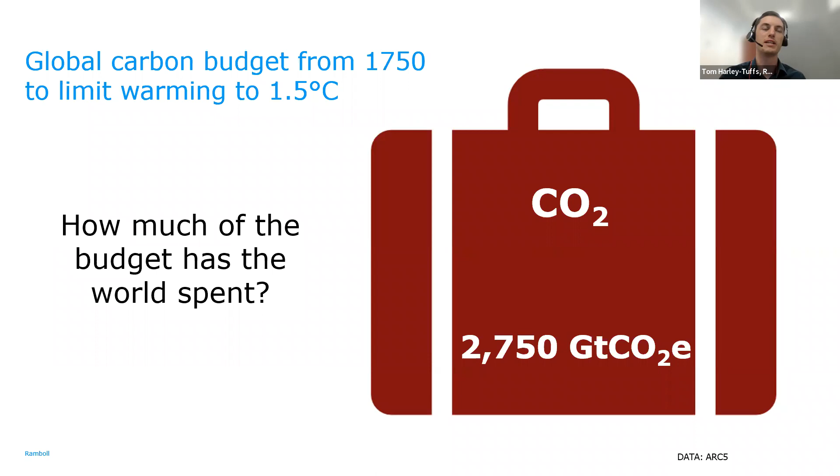So this is our global carbon budget. As of 1750, if we want to stop the world from warming more than 1.5 degrees on average, we have only got 2,750 gigatons of carbon dioxide to spend. How much have we spent so far? Unfortunately, we've already used 90% of that budget, so we're quite a long way there. The latest IPCC report is pretty damning and says we're pretty unlikely to get 1.5 degrees now.

The most depressing thing is that I made this slide 3 years ago and had to chop off 5% and 3 years of remaining life left. So we're not moving fast enough and we need to change what we're doing now. I hope that's fairly clear and obvious from all the work you've seen and all the press recently, but yeah, this is very much our problem to solve immediately.

Our current spend globally is about 42 gigatons a year. So at this rate, we've probably got less than 7 years left. There's a good chance we'll actually pass the 1.5 degrees C warming threshold before 2030, which is obviously not ideal.

But buildings are a really key part of this, and you guys have got a lot of influence over this. In terms of global emissions, buildings contribute about 40% of that. So 28% roughly is the operational emissions - that's the running, heating and cooling of buildings, using electricity for services, things like that. And then 11% is the embodied emissions, and this is where we have a big influence as structural engineers, because this is basically all the products and emissions that go into manufacturing products and construction materials.

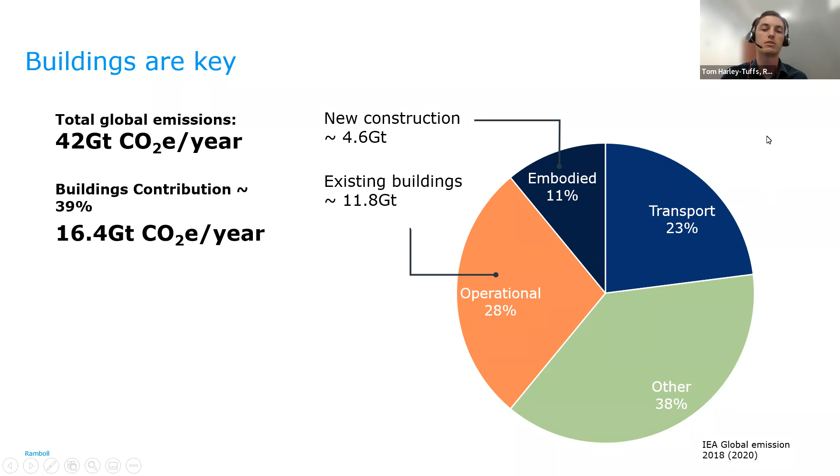So does anyone want to have a guess at what their influence is? This on the left is your personal influence. I had a quick look online - I think it kind of depends exactly which Caribbean nation you live in, but it's somewhere between 2 and 3 tons, potentially a bit more in Trinidad, I can't quite work out why. In the UK it's about 5 tons, although to be fair we tend to export all our emissions, so we don't manufacture products in the UK - we get them from other places, and there's a bit of accounting magic going on there.

But this is like your kind of personal impact - all the food you eat, heating or cooling your home, driving around, getting to work, etc. Does anyone have a guess at what your professional emissions are likely to be in the order of? This is like the influence that you have over projects. Feel free to put your answers in the chat.

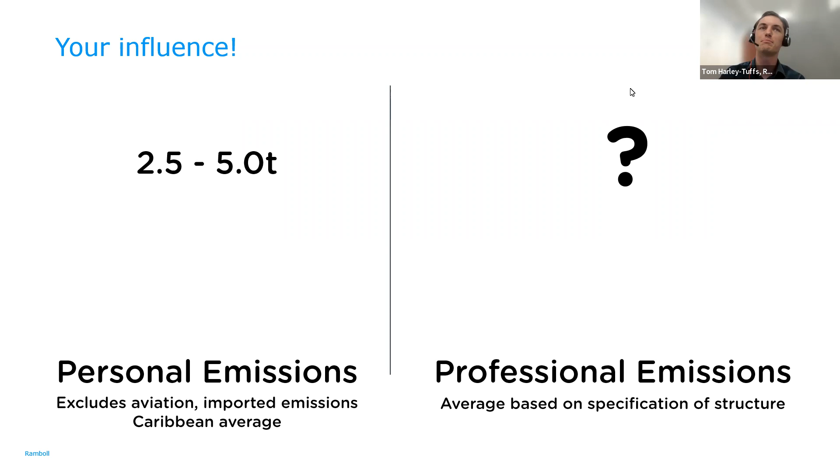I'll give you a clue - it's more than 2.5. No guesses? No one has any idea? Oh, 20 tons? 3.5? All good guesses. Yeah, it's more than that, a bit higher. The answer is about 900.

So this is based on a study that we did in the UK of our building structures teams, and it was based on basically the total amount of buildings that we design in a year, divided up equally between each person in the buildings team. So this is your professional influence. It depends exactly how you measure this, but it's going to be orders of magnitude, probably at least 2 orders of magnitude larger than your personal impact.

And the upshot of this is that if you can design your buildings to be 1% lower carbon, so you can cut 1% off the footprint of your buildings per year, you've already saved more than if you cut your entire personal carbon footprint. So the biggest impact you're going to have is through your professional career.

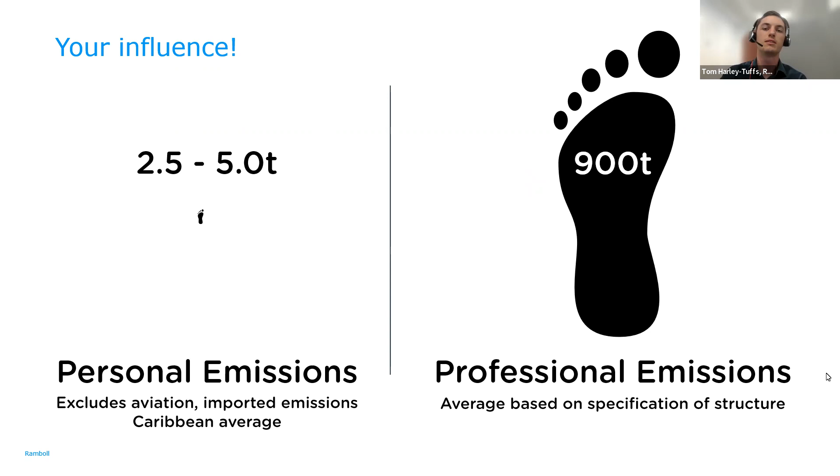So how do we actually do that? Well, first of all, we need to know where the carbon is, and that's where life cycle assessment comes into it. Life cycle assessment is basically the tool to measure environmental impacts of construction. It's pretty simple really - we design some buildings, you calculate all your material quantities, and then you multiply those quantities by suitable carbon factors, and then you add it all up. It's just a big accounting exercise, basically, and you get a carbon footprint at the end.

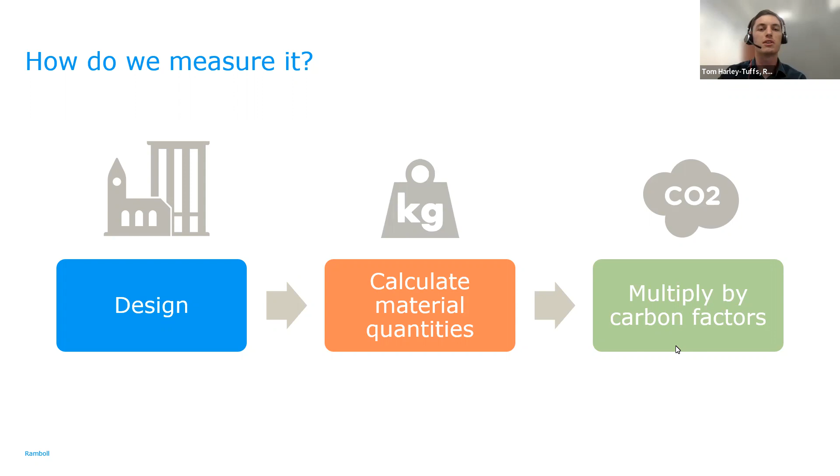And that kind of tells you where the carbon is in the building. It's slightly more complicated than that, but that's the high level principle. You might have seen this before - these are the different life cycle stages. I've pulled this out of the IStructE guide, how to calculate embodied carbon. I'll talk through each of these in a little bit more detail. So at different stages of the building's life, it has different environmental impacts, and the materials and products that go into the building have different environmental impacts, hence life cycle assessment covers the whole life cycle.

There's first of all the product stage, which is your A1 to A3. So this is all the kind of upstream impacts of basically manufacturing the materials - that's extracting all the raw materials, transporting it to a factory, the manufacturing processes and any kind of energy used, for example in processing steelwork. There's a lot of energy in the A3 stage. Then you've got to get it out of the factory gate to your site.

So that's the A4 transportation stage. And then you've actually got to assemble it and turn it into a building, so that's the A5 construction stage. These A stages are basically everything that happens before the building is occupied, up to practical completion. That's often referred to as A1 to A5.

And this is kind of where you can have the most impact. If you look across the whole building, it's not just the structural bits, something like half of the whole life embodied carbon is just in these upfront bits, plus another 5% on transport and construction activities.

Then the building's in use, and over the next 60 years it's going to be used, maintained, repaired. Maybe you need to replace the facade at one point during its life, but you keep the structure. This is more relevant to the architectural and services bits, because most of the time we put a structure in and leave it. We don't have to worry about it because we design things to be durable. But that's the B stages - that's all the in-use bits.

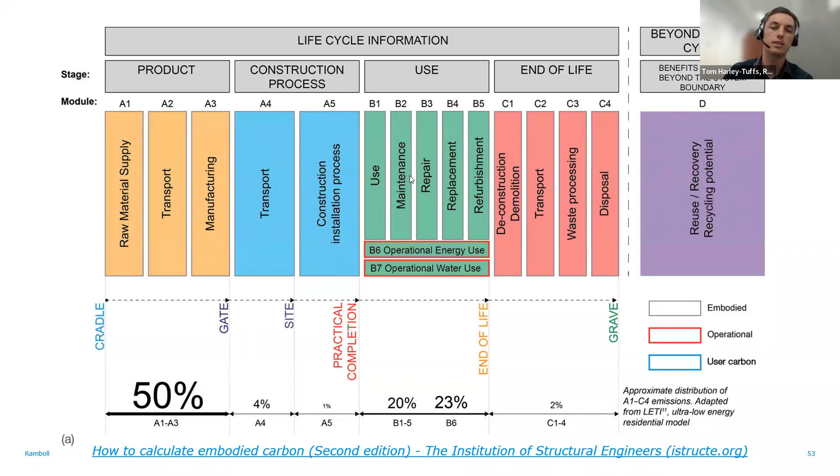So that's also kind of a measure of circularity, although not really a very good one, but it gives you an idea of it. The vast majority of these carbon emissions are actually in the upfront bit, and that's also where the majority of the structural engineer will have an influence. So when is the carbon emitted?

This is like a life cycle of the building. Most of it is going to happen at year zero, before the building is even built. Around 50% of the building's whole life emissions actually occur before the building is even occupied, so this is where we can have the most impact. And then these next bits happen over the next 60 years or so.

Hopefully electrical grids will decarbonize, and this will reduce over time anyway. And with any luck, in 60 years time when this building reaches the end of its service life, there'll be better systems and processes for recovering materials, which also reduce that. So really the main impact we can have now is in this upfront stage.

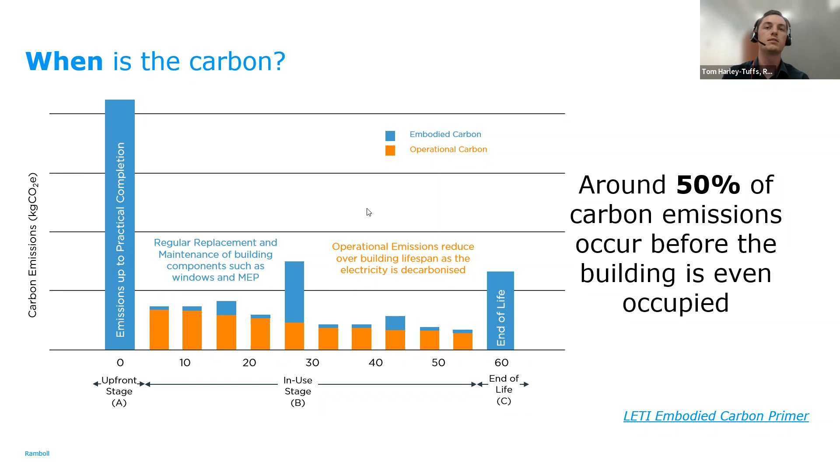It's interesting that if you break down those upfront carbon emissions, the structure is actually the majority of those upfront emissions. This is an internal project database we've got, and we've taken an average of about 50 different projects here. This is not just looking at structures, it's looking holistically across the whole building. And of your upfront emissions, the structure is more than 50% of those initial upfront emissions.

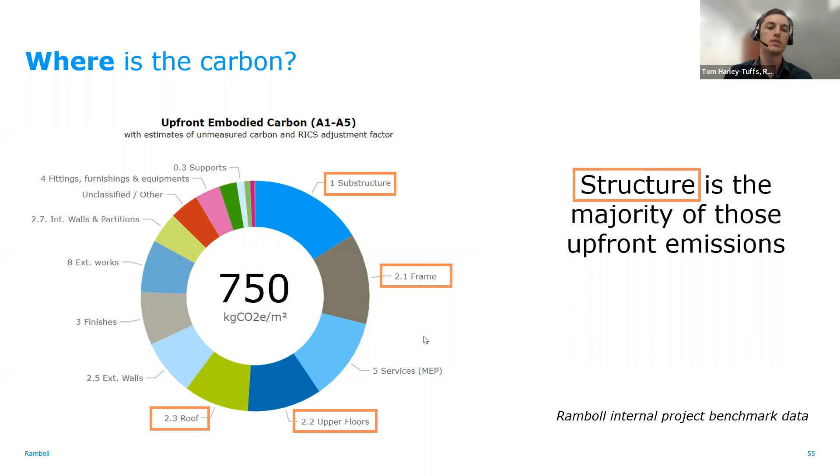So the question is, where is it in the structure? And again this varies quite a lot. It could be in the substructure - if you've got a large basement, for example, basements are very high intensity. It could be in the structural frame, it could be in the floor slab, and usually the floor slabs are quite significant. It could be in the roofs, or in the stairs and ramps. But this just shows that there's a huge amount of variability in projects.

Trying to draw a consistent benchmark and say every project needs to be less than 300, or whatever number you pick, is quite difficult because there's just so much variation. It's very project specific. We had a question about targets last week, and this shows you how hard it is to actually draw a realistic target.

It's worth noting that some of these, basically all the ones down at this end, these small impacts, are all just refurbishment projects. So there's very little in the way of structural change going on, and therefore the impacts are quite low.

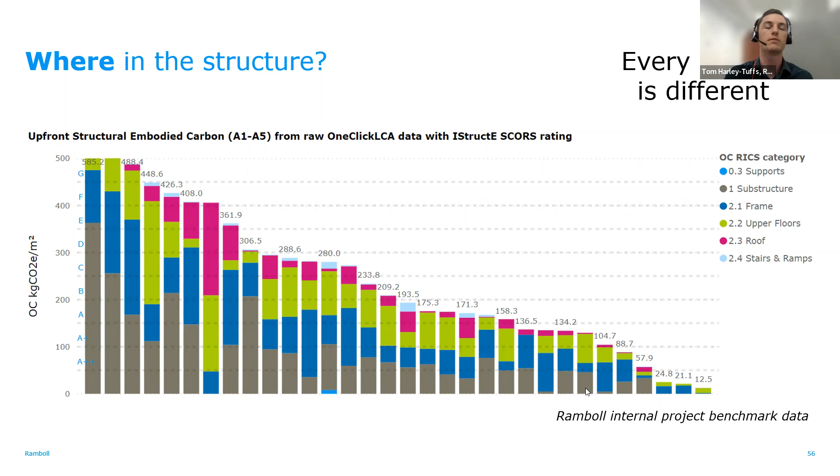So what materials actually are contributing to that carbon? Well, certainly in our project database, the majority of it is the concrete, ready-mix concrete, either regular strength or high strength. It's the reinforcement going into the rebar, it's structural steel and steel profiles, and then it's site operations as well - basically excavation works, piling rigs driving around, energy and fuel use on site. This is the A5 bit of your construction. But these key structural materials are a really big impact.

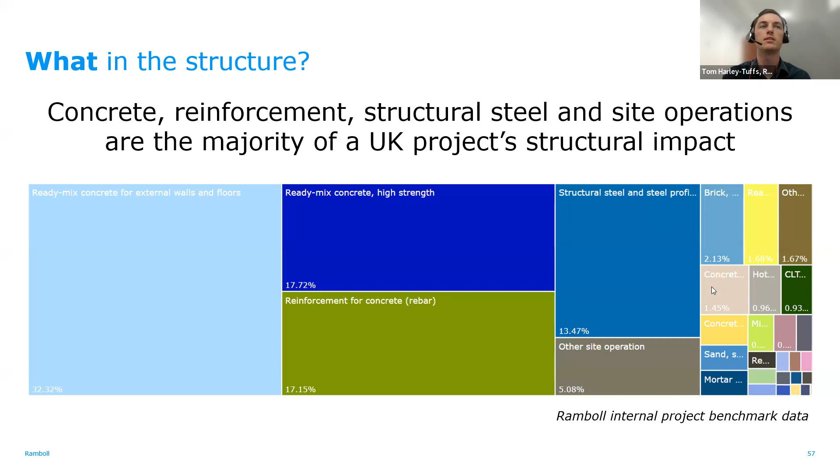There's a bit of CLT and some other timber stuff in here, but that just shows you how uncommon timber construction is still in the UK - our selection of 50 projects doesn't necessarily include that much.

Great, so now let's talk about material impacts. We understand where the carbon is and what the different life cycle stages are, and basically how to account for it.

We've got another challenge for you, which we'll see if this works. It seems like it's a slow lunchtime for everyone. But we've got a few carbon factors on screen - these are kilos of carbon dioxide per kilo of material used in the building. We've got some very high intensity materials here, and there's also relatively low intensity materials down here, or some averaging ones. Not quite sure how I'm going to do this pop quiz, but there's a few different materials.

We've got steel, concrete, timber, insulation, and plasterboard - 5 options here. So maybe just have a think about which ones you think are going to be the highest intensity, and which ones you think are going to be the lowest. Maybe I won't do answers in the chat since you'd have to cover all of them, but just think about it - for example, you might expect concrete to be really high intensity because you've heard it's really bad.

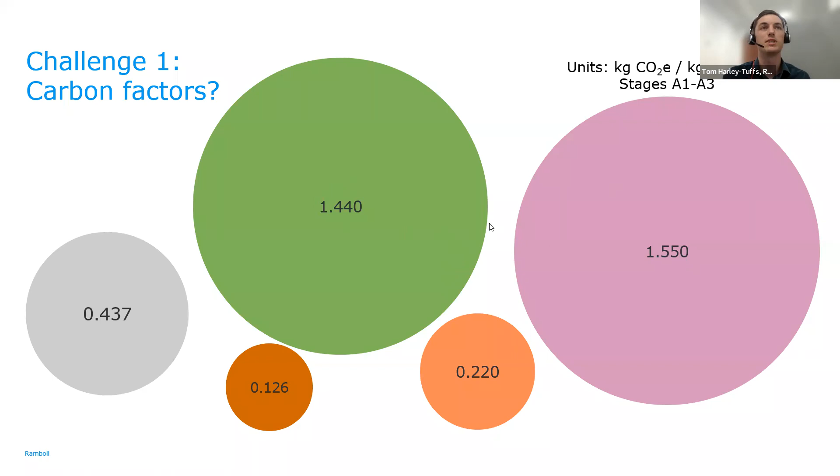These are your different options, and you can see that actually rock wool, your insulation, per kilo is almost as bad as steel. Concrete is actually the lowest out of all of these - concrete has the lowest carbon footprint per kilo of material used. And that's the key thing.

This is just the material impact, just the carbon factor bit. You've got to think about the quantities as well, because quantities times carbon factor gives you the total impact. If you just look at these factors on their own, you're going to get a skewed picture, because one kilo of concrete is not functionally equivalent to a kilo of steel - we use them in very different applications.

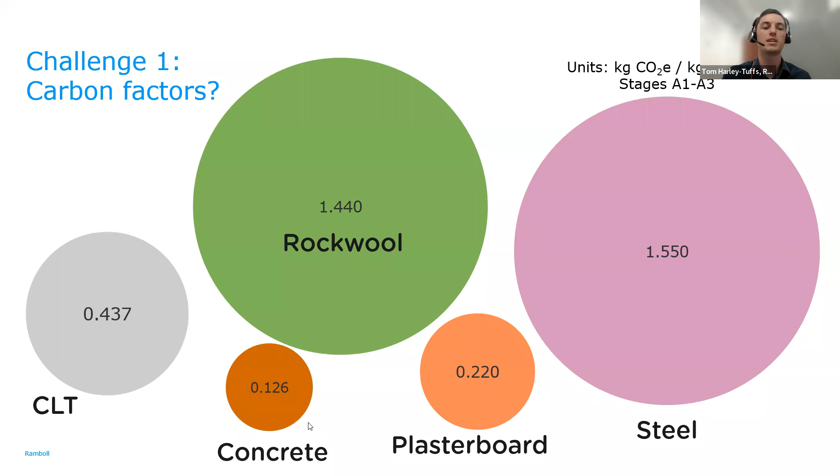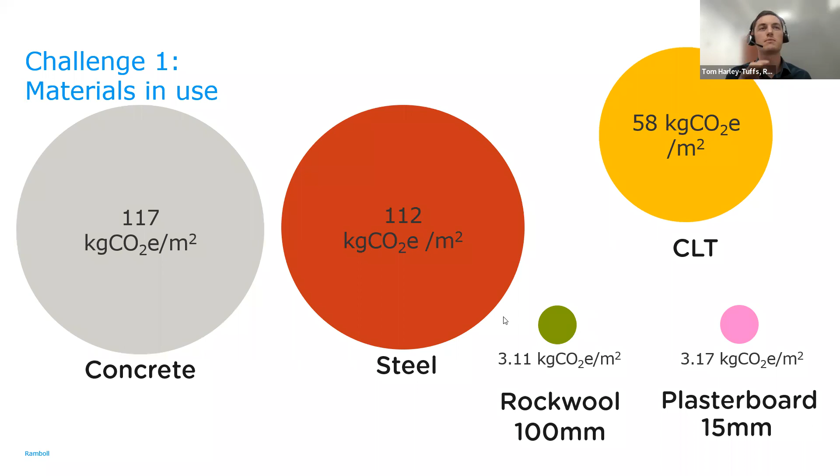Maybe your CLT is a bit more efficient because you need more of it, but it's quite low impact compared to steel. And rock wool and plasterboard - there's not a lot of them going in by mass compared to structural materials, so despite rock wool being very high impact, it's actually quite low carbon overall, and also very light, so hardly any weight. So the carbon factors themselves don't really matter that much - it's actually how you use it in the project that's the important bit.

So here we go, we've got 4 more answers for you. Which of these do we think has got the lowest embodied carbon impacts? We've got some carbon rates here - kilos of carbon dioxide per meter squared of floor area created. And we've got 4 different structural schemes here for a 9x6 meter grid.

We've got a flat slab RC frame with 290mm structural depth. We've got a composite steel frame and metal deck. We've got steel beams and columns with an LVL slab - that's laminated veneer lumber, quite an efficient timber system, but then with more steel. And then we've got a glulam and CLT system.

So maybe just stick your answer in the chat. Which one of these do you think has got the lowest carbon impact? 1, 2, 3, or 4? I'll give you a minute for that.

My vote is 4, going for 4. Okay. A few more 4s. I'm 4. Someone said 1 - controversial. 3.

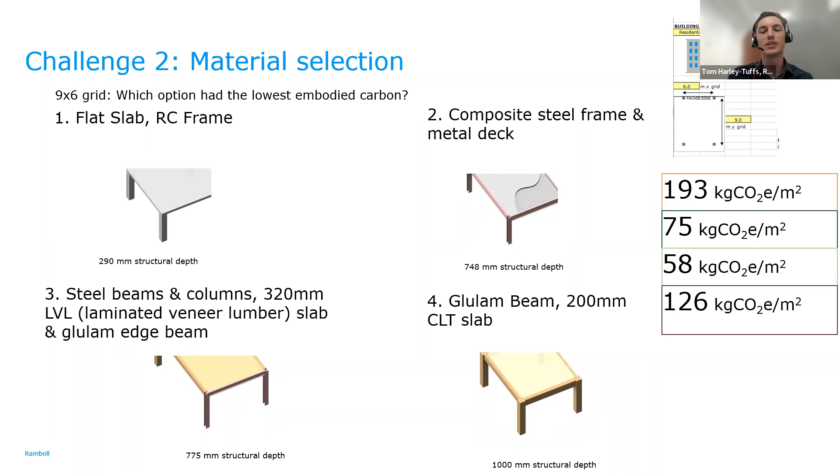All right, I'll give you the answer. It's actually 3 - your steel beams and LVL slab, in this analysis at least, tend to be the lowest carbon impact. And that's because your LVL slab is very efficient in its use of timber.

It's like a cassette system, so you're putting the material in the flanges. You're using timber, which is already kind of low impact, and you've got much less volume. So if you use a CLT slab, then basically all the material in the middle is kind of wasted - it's not really doing anything structurally. Whereas an LVL slab, because you're making a cassette, you're doing your slab incredibly efficiently.

And the majority of the structural embodied carbon is usually in the slab. So basically, if you get your slabs and your beams right, then everything else just kind of works anyway. So it kind of points you towards picking the right floor structure more than anything else.

And actually, there's a little bit of steel in here, but because we've mixed - we've used steel in the most appropriate place, and then used glulam beams everywhere else to kind of tie things and use timber for the floors - then it kind of works quite well.

Your composite steel frame and metal deck is the highest, and that's mainly because the profiled metal deck that we're using to support the concrete is very high intensity. You've got a lot of steel in there, basically, per meter squared of floor. So they're making basically a whole sheet of steel across the whole floor plate, and then also some concrete on top of that and rebar potentially.

And your flat slab RC frame is fairly efficient, although of course this is not very circular. So when you demolish this building, you can't really do anything other than crush it down to aggregate. Whereas in theory, your steel and your CLT could potentially be reused a bit more. So worth thinking about that as well, not focusing too much on the carbon.

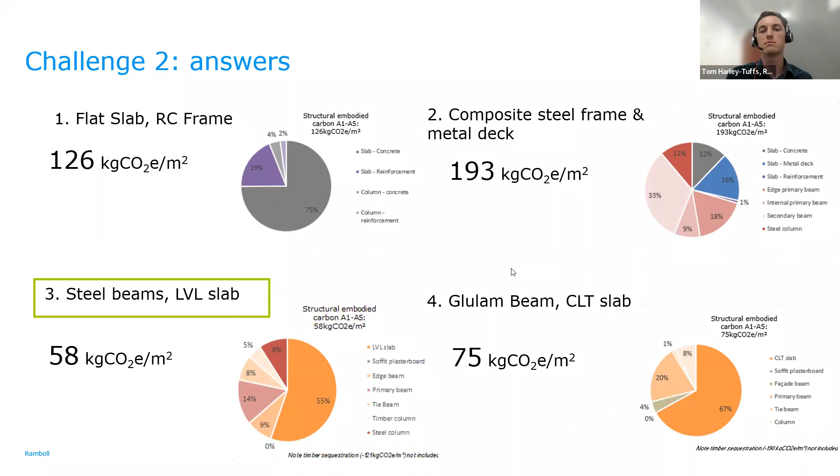But yeah, maybe a slightly surprising result there. Okay, so how have I actually come out with working these carbon footprints out? So the IStructE here, I've got this guide called How to Calculate Embodied Carbon, which hopefully you guys have seen before. Just gonna grab a drink.

I'm going to talk you through a kind of worked example. You don't have to go along with this because it's a bit of maths involved, and it seems like everyone's eating their lunch anyway. But here I'm going to talk you through basically how we calculate the carbon impact of, say, a typical concrete flat slab. So in this example, we've got a 9 by 9 meter concrete frame on a structural grid. It's a 350 thick slab, a C32/40 concrete mix with 100 kilos per meter cubed of reinforcement in that concrete.

So basically the process here, and the guide How to Calculate Embodied Carbon talks you through this in a lot of detail, so you can go back and refer to that later. But basically what we want to do is work out all the material volumes and weights first of all, then select some suitable carbon factors, which the guide gives you. Then you calculate your A1 to A3 carbon per meter squared of floor.

That's the upfront carbon emissions from manufacturing the materials. Then we work out our transportation emissions - so how much carbon is expended getting all this concrete to site and reinforcement. And then how much is part of the A5 emissions, so the waste that is generated on site, and also emissions from site operations and driving diggers around and whatever.

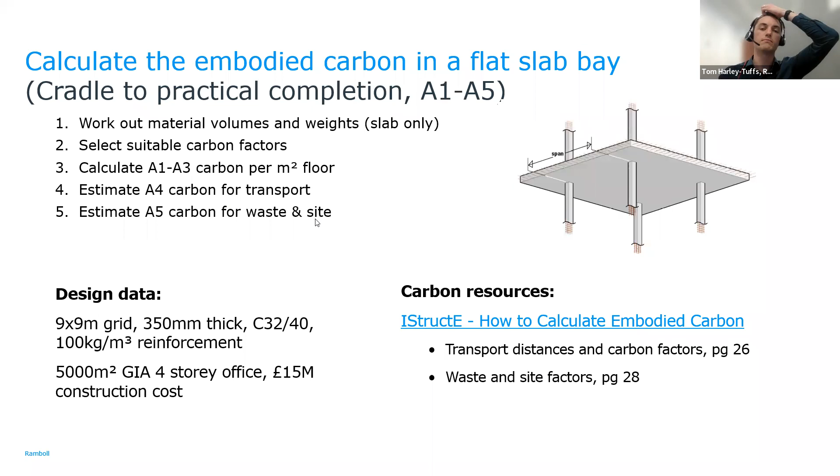So just run through it then. Work out material volumes and weights. Hopefully you can all do this.

Slab thickness times your 9x9 grid gives you 28 meters cubed of concrete. We've got 100 kilos per meter cubed of rebar, multiplied by that volume, and we get about 2.8 tons of rebar. And then in terms of the weight of that concrete, I've taken 2450 as my density, so we've got about 69 tons of concrete.

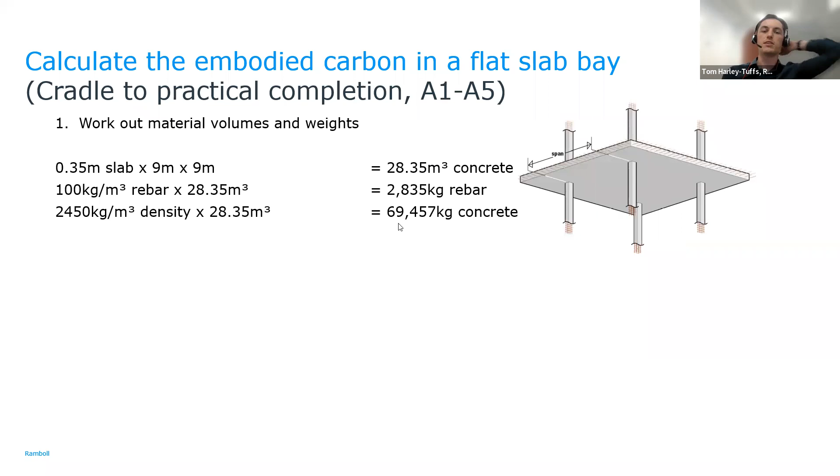So we've got a kilos of materials, we've got the quantities. So now we need to multiply those by some carbon factors.

So I've pulled out this table from the IStructE guide. They give a few different examples of different concretes, and some examples of different strength grades in the UK, first of all, which is quite useful to see anyway, because fundamentally, if you've got less cement in the building, which you will have for lower strength concretes, then you will have lower carbon factors.

But they've also included this global average, which I thought was probably most appropriate if we're talking about buildings in the Caribbean. I did have a little bit of a dig to see if I could find EPDs and kind of better carbon data for that region, but I couldn't really find anything in the one-click database. And I don't know if that's just because you don't do much in terms of concrete and steel production on the islands, and is it mainly imported from the US, or yeah, I'm not sure. I'm not too familiar.

Concrete is manufactured across 3 countries: Barbados, Jamaica, and Trinidad. The other smaller islands would get imports from those countries. But perhaps the manufacturer, which is a Mexican company, I believe CEMEX, maybe they don't publish carbon data, so that could be why. Okay, yeah, that's good to know.

So probably the best way to do it then would be to look up the CEMEX EPDs, because maybe they'd have a kind of general regional one, and they might publish it on their website, for example. So if you wanted to get a slightly more accurate picture rather than just this general one, then that might be a good starting point.

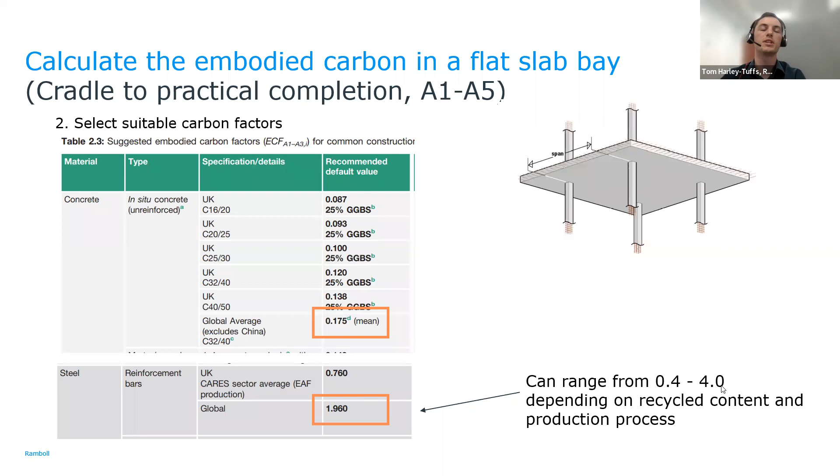But the electric arc furnace using 96% recycled content could have a carbon factor as low as 0.4. And then actually most UK produced steel uses quite high recycled content, so we have a lower carbon factor here. If you're using all virgin materials and no recycled content, then it could be up to something like 4 even potentially. So there's a big range here, but let's take a number in the middle - we'll take 2 for this exercise.

So we've got our carbon factors. Now we do carbon factors times quantities. So 2.8 tons of rebar times our carbon factor of 2 gives us about 5.5 tons or 5,500 kilos of carbon dioxide for the rebar that's gone into this bit of slab. And similarly for the concrete, times our 0.175, we've got about 12 tons of carbon dioxide. So that adds up for this 9x9 bay to be 17.7 tons or 17,700 kilos.

But then we want to prorata this down to a per meter squared GIA. So if you've just got a big number, 17 tons or whatever, it's kind of meaningless without knowing how big the building is. So in order to compare buildings like for like, we always want to bring it back down to a per meter squared rate, so we can compare large buildings and small buildings and get more of a feel for how these numbers work and what they mean.

So that then boils down to 219 kg of CO2 per meter squared. I think I got my maths right, but shout if I've done something wrong here.

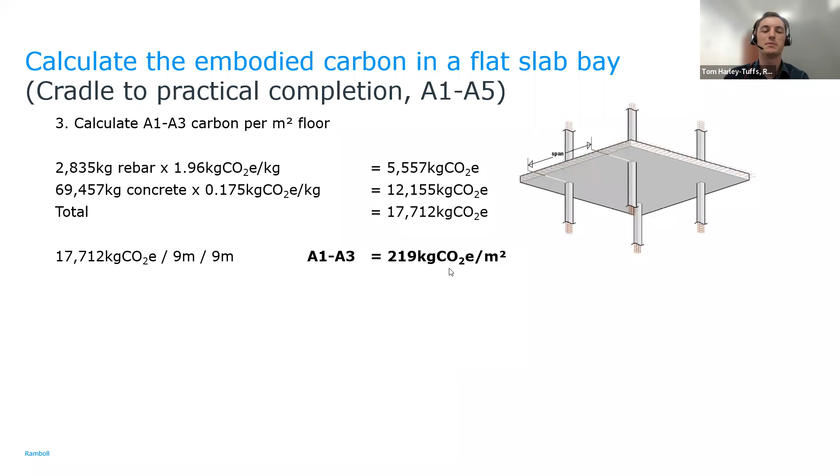So that's the upfront emissions, really quite high if you're familiar with carbon factors, but we'll come back to that later.

Now we're going to work out the transportation emissions, so that's the A4 bit. The IStructE guide has got some really useful carbon rates for it, and it tells you how all these are calculated, but it's basically worked out per ton kilometer based on the different transportation methods.

You see that actually sea transport emissions are very low. So per ton of material per kilometer taken by sea, it's like an order of magnitude less than if you took it by road. So sea transport is a very efficient method of transportation, at least in carbon terms. And if you're flying stuff around the globe, it's like 6 times worse than driving it per ton, which is maybe not too surprising. So avoid flying things in and get them by sea instead.

So the concrete I've assumed is manufactured locally, so sounds like I got that right. But then the rebar I've assumed that it's come by sea, so I've just said it's kind of global manufacturing. I've used the default transportation distances of 50 by road and 200 for global manufacture with 10,000 by sea, and that gives you some rates per kilo of carbon dioxide per kilo transported. So it all adds up to basically this being another carbon factor.

And then we multiply our total weight of concrete by that first carbon factor, which is the local transportation one, so quite low, and we get 347. So there's a lot of concrete, but it's a very short travel distance potentially, so that ends up being about 350. And then the rebar, there's much less rebar, but it's come much further, so then those two kind of balance out. And then when you divide again by the total area, you get 11 kilos of carbon per meter squared.

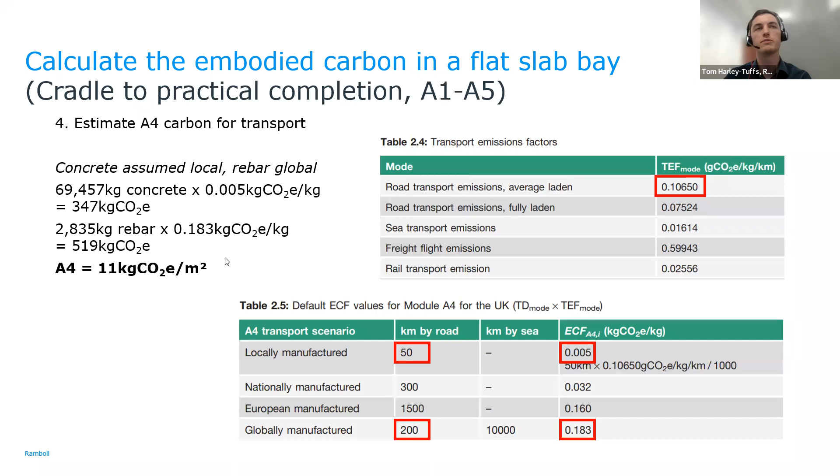So 11 compared to 219, transportation not that significant it seems in this case. But obviously that depends very much on your input assumptions and everything, so pick ones that are relevant to your project.

And then we're going to talk about the waste as well. When you make concrete on site and pour it, then potentially there's going to be some wastage, and same with rebar, maybe off cuts and things like that. The IStructE guide gives you some examples of waste rates, so concrete they think is about 5%, and rebar about 5% as well.

It gets a little bit more complicated to work out. I won't go through all the details, but basically you have to account for the fact that you've had to make a bit too much concrete in this case. You've had to make an extra 5%, so there's some carbon associated with that. And now you've also got to take that waste off site during the construction process and dispose of it somewhere, so you've got some end of life emissions, but during the construction phase.

So the C stage calculations kind of crop up again in A5 because you have to account for the fact that you've overproduced and then also had to take that material away and get rid of it, and there's emissions associated with that. I won't go through it in too much detail, but basically there's a method for doing that, and it works out about 13 kilos of carbon dioxide per meter squared in this case.

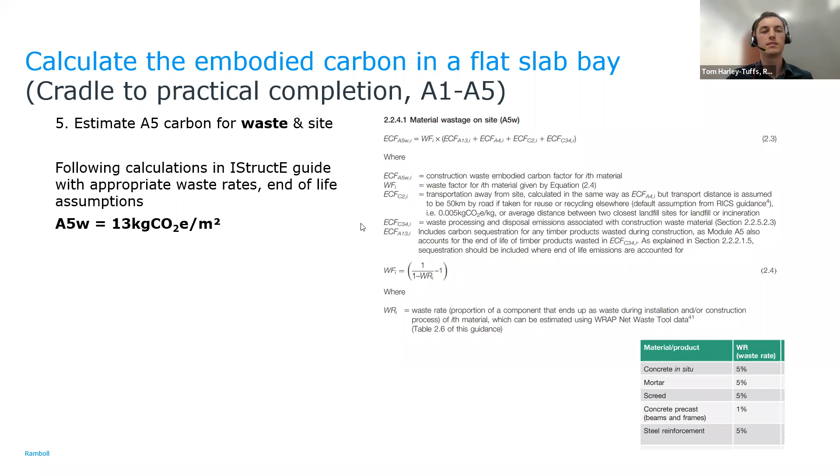So that's the waste bit. And then finally, there's the site bit as well. So this is the actual, this is driving a concrete lorry around or a piling rig or whatever, putting up your formwork, setting up all the site and doing all the prelims and everything else. This is quite difficult to measure unless you've actually got data on fuel and energy use on site and water use and things like that.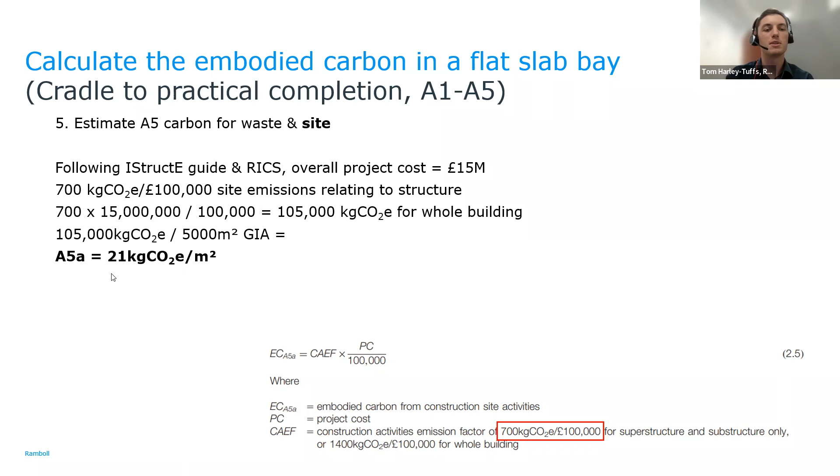Generally, there's some kind of rates given in the IStructE guide as well and RICS, so they'll just give you a kind of starting point. And if you work through these, it's questionable how relevant it would be for construction sites in the Caribbean, because these are all based on basically production sites or construction sites in London. But it's maybe in the right order of magnitude, perhaps. Very welcome to be challenged on this, and if anyone's got better data, that'd be really interesting to hear, so feel free to share that. But that works out about 21 anyway, using these kind of default rates and stuff.

So summary then for our 350 mil flat slab RC bay: we've got quite a lot of concrete emission from manufacturing it, quite a lot of rebar, not very much from transportation, a reasonable amount from the waste, and a reasonable amount from the site as well. It all adds up to about 264 kilos of carbon dioxide per meter squared.

Remember, this is just the slab. We haven't included columns, core walls, foundations, all the other bits as well. So per meter squared of that bit of slab, it's that much. But you need to do this again for the rest of the building, quantify everything and work it all out, and that will give you the actual carbon rate that you can report.

But we don't stop here, obviously. This is just a number, and the number's kind of meaningless unless you're going to use it for something and take some action. So here I've looked at what if we did a 25 mil thinner slab, and we could see that that cuts 7% off. That's quite a good benefit.

And what if we change the concrete to something like 25% GGBS? That's a much more significant reduction, actually, 14%. Although obviously noting the things I raised last time with specification, you can't just spec 100% GGBS and think you're done. You need to still do the reduction first, and then the GGBS and cement replacement specifications last.

So it seemed quite long-winded, but hopefully not too complicated in principle. The guide does go into a lot of detail on how to do it, so it's fairly straightforward to follow.

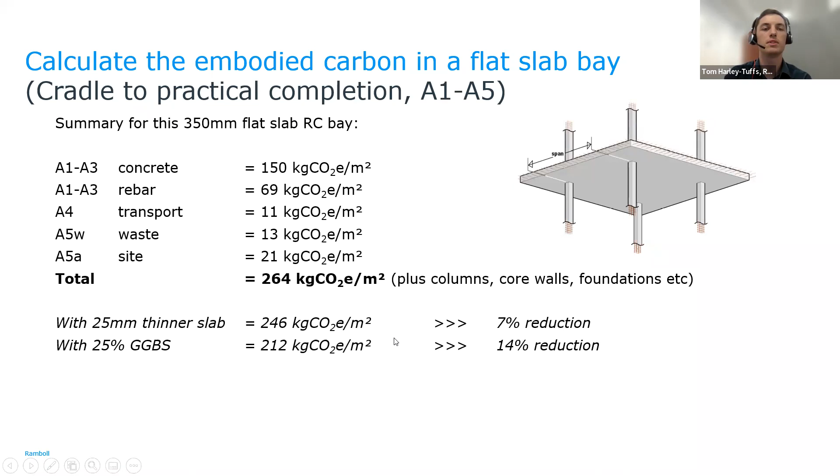But fortunately, there's a tool which does all this for you. So if you want to save yourself a bit of time, you can just download the Structural Carbon Tool version 2, which came out... I think it's more recent than March last year, that doesn't sound right. But anyway, this version 2 of the tool is out, and it does all this for you basically. And it's free.

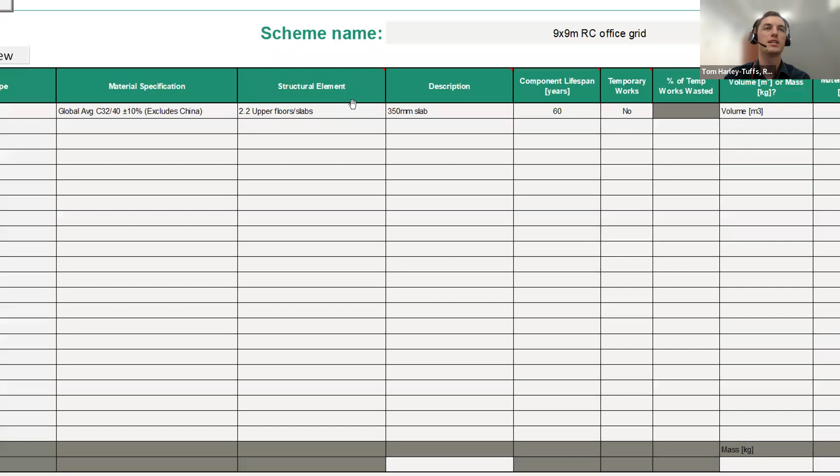So it looks something like this. Here I've plugged in that first calculation that we did. Let me zoom in a bit so we can see this properly. I've picked my material, picked the material type, picked the material specification, and given it a location as well. It can also break it down and tell you where most of your carbon is, like in your slab or your columns or whatever.

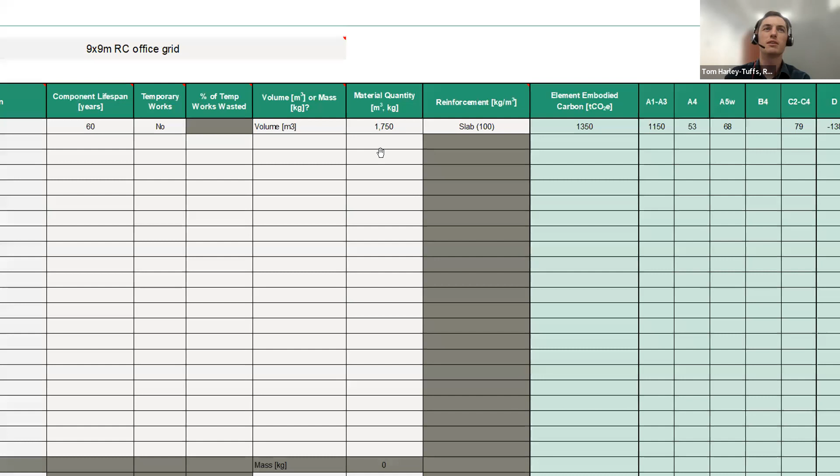Put in a description, some volumes. These numbers don't match because I was trying to work it out for a whole building, but hopefully you still get the idea: you just put in a material quantity here and some reinforcement quantities here, and it basically works it all out for you. As a bonus, it even does the B4, C stage and D stage calculations for you, so you get those for free.

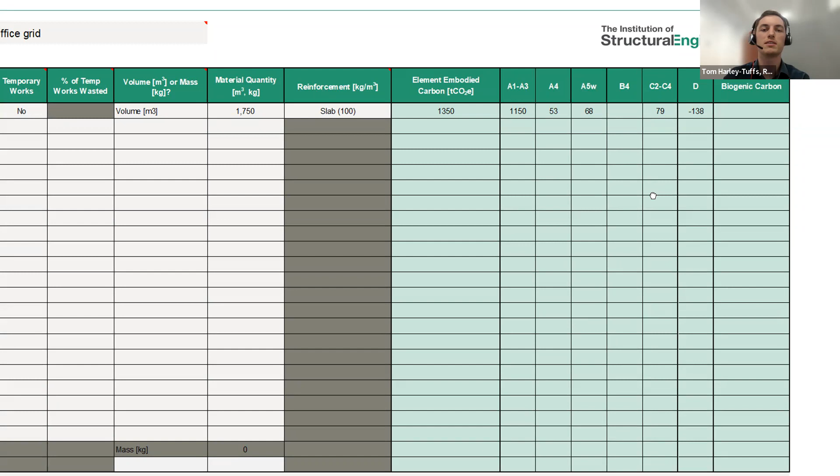So it's a similar principle again - there's some carbon factors you multiply your quantities by, and then it all gets spat out at the end. Based on this, if our building was just a slab everywhere, somehow floating in the air with no columns and no substructure, we'd be getting a SCORS rating of D, which is not great, I'm gonna be honest. Really, D is kind of the target for most buildings we're designing today, and we need to obviously get better and better over time.

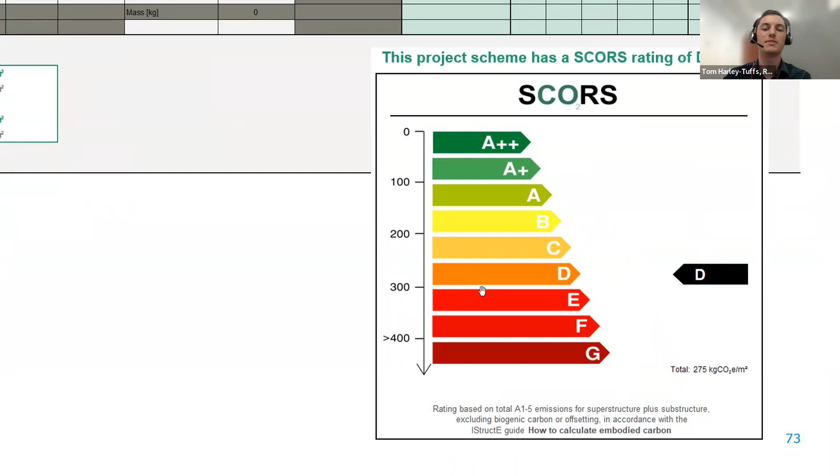So there's not much budget left in this particular building for everything else that needs to go into the structure. But it gives you a starting point, and an idea of how to work it out, and then you can start making changes based on this, like perhaps tightening up your grid so you can make your slab thinner.

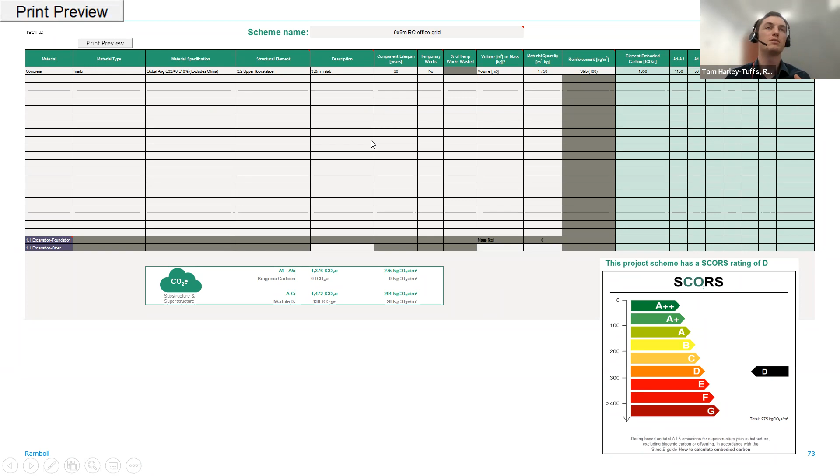All right, so that's how we calculate all of this. Now I'm going to talk a bit about informing and influencing - how do we actually use these results to try and influence clients, change designs and make an impact? I think the key thing to remember is that life cycle assessment is always a tool to make informed design changes. We don't want to be measuring it, just getting a number and saying okay great, move on.

We need to actually use this as a starting point and use this data - it looks like all the carbon is in the slabs, what can we do about that, for example? These are just a couple of examples, presentations that we've used for clients before.

So here we looked at the option of - this is a whole building life cycle assessment - and we looked at the impact of changing from an in-situ slab to a post-tension slab. It's 15% savings in the overall embodied carbon, but actually for the structure alone you can save like 50% by doing this on this particular project. So PT seemed like quite a good solution there.

And here we looked at a pathway for a project to get down to their carbon goal. They had quite a high starting point at that early stage in the design, but then we looked at potential moves the design team could make. Some of them structural, again PT slabs, GGBS, those sorts of things, trying to get them down towards their aspiration and make some savings there.

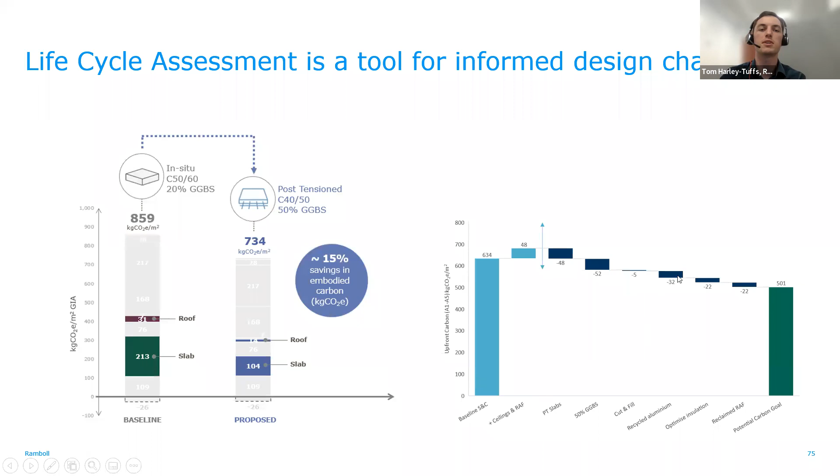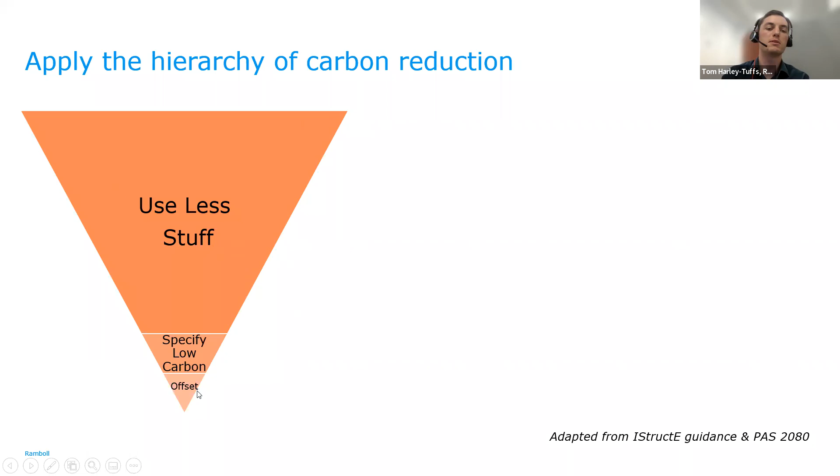The key way to do this is to apply the hierarchy of carbon reduction. Use less stuff, top of the hierarchy, then specify low carbon and offset at the end. But really we need to go back to the start and challenge the brief. Do we need to build anything at all? Can we get away with refurbishing an existing building? Can we optimize and make this more efficient?

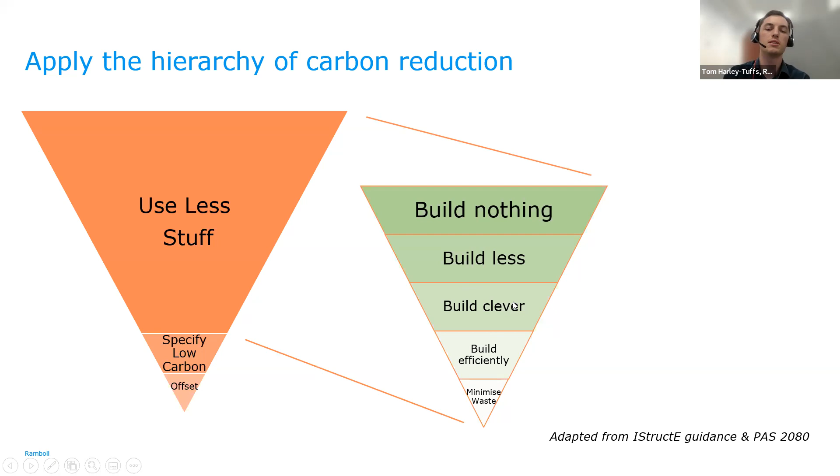Ways to then report that to the client. I think there's no reason why we shouldn't be reporting carbon with our scheme design options just as standard. Here's an example from a couple of projects, one in Manchester, which is an office development.

The client was interested in a few different ways of framing this building. They wanted to compare steel to concrete. So as part of that, we used the IStructE tool to do a very simple embodied carbon calculation. We put this in front of the client and said, look, these are the impacts of your decisions, and these are the things we can do to optimize this.

I think engineers like having a number as well, a figure we can target and try to improve against. This is one of the first times, I think, in the structural engineering industry, that we have a thing we can optimize for which is actually doing good for the planet.

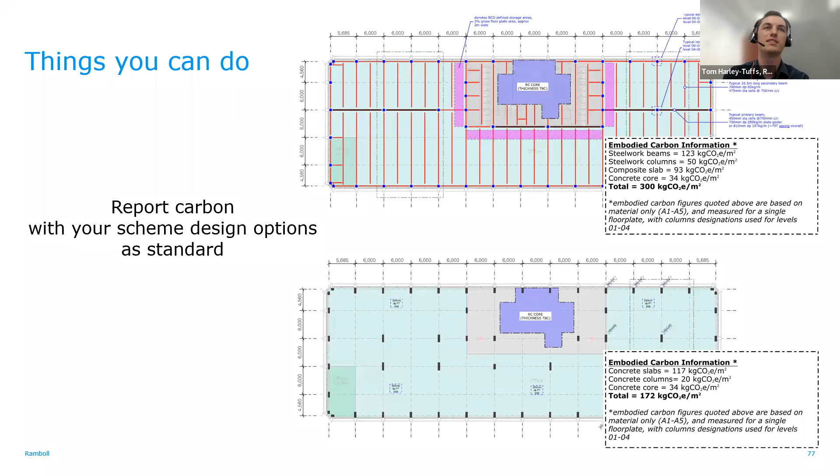Another very valuable thing is showing comparisons to similar projects. These numbers are kind of meaningless to most people - you just say 300 kilos of carbon per meter squared, what does that mean? But if you show comparisons and say, you're designing this hospital, here are three other hospitals we've worked on recently, and they've all got a much lower carbon footprint, why do we think that is? Then suddenly people sit up - I put this up in a meeting and everyone was really interested.

Like, what have we done wrong here? What can we do differently? Why are these projects better? We added office comparisons too, to see if it's just hospitals that are lower, or if offices are generally higher as well. These kinds of things really spark debate when you put them against their peers and ask, are you doing better or worse? That helps quite a lot.

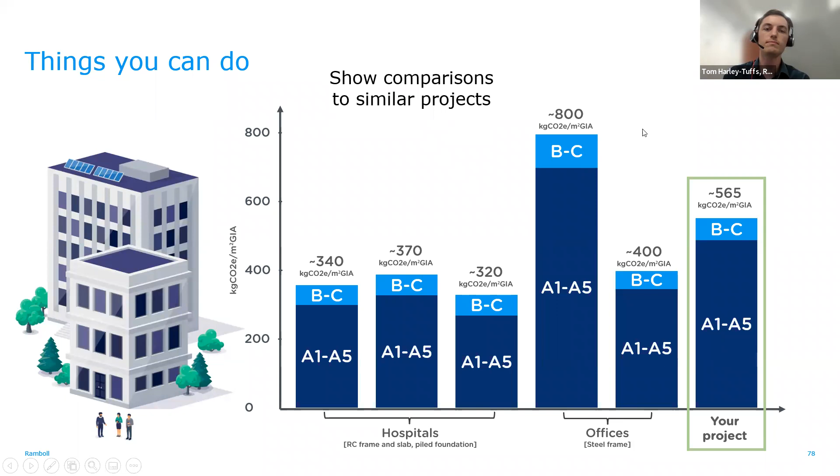Really the key thing is to integrate carbon and circularity impacts into all your design team decisions. This is an opportunity matrix we developed on a scheme. For all these potential changes to the design, we looked at the upfront carbon impact, circularity impact, and then also cost, program, and quality - the usual things.

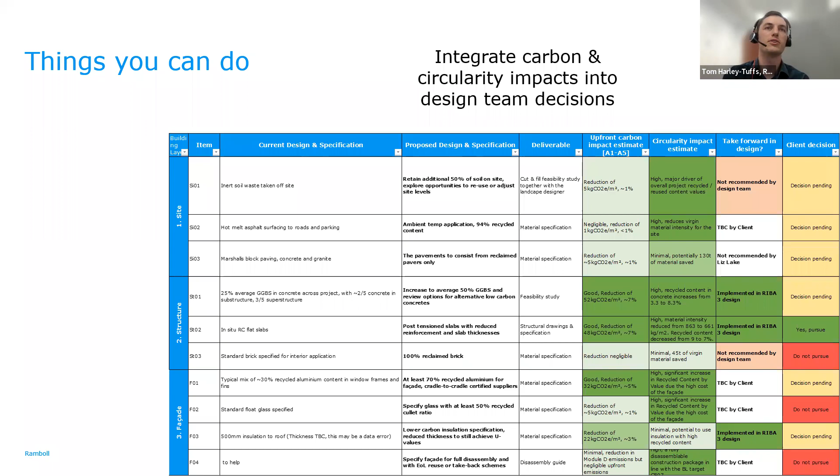So it's the three things of cost, time, and quality. There's now a fourth dimension, which is sustainability, or carbon, if you want to narrow it down to one figure. That really should be part of all our decisions going forward. As structural engineers, we're basically in the right place to provide those figures and that value.

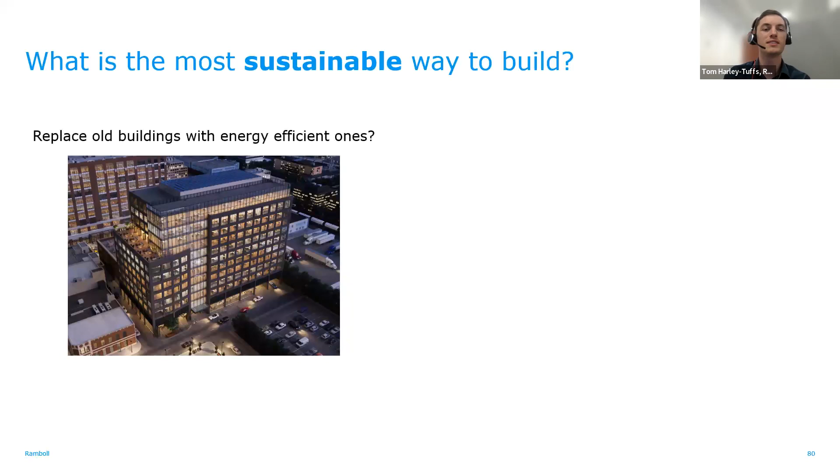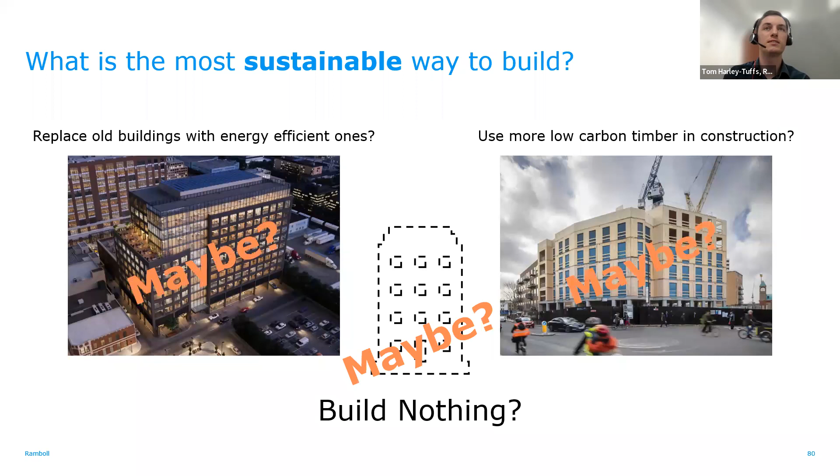Back in the previous session, I asked what's the most sustainable way to build. Was it replacing old buildings with energy efficient new ones? Was it using more low carbon timber in construction? Was it building nothing? Maybe it could be any of these things. But actually, I think the most viable solution we have right now is just to upgrade and refurbish older buildings - minimal carbon impact, maximum social benefit, and hopefully some economic viability, ticking all the boxes.

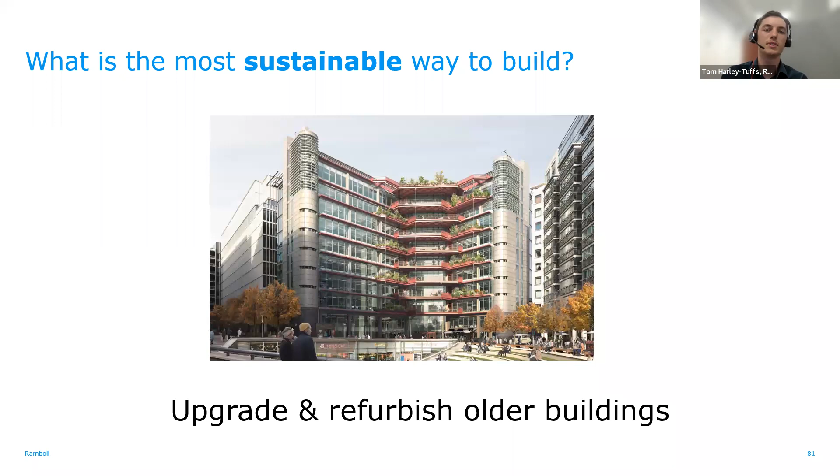So that was all from me, a fairly quick run through. Hopefully not too painful, all the maths, but I'm very happy to take any questions now, and we'll have a bit of discussion about this.

That was really quick, Tom. I feel like I could listen to you for another half an hour. I'm pretty sure you have enough data to keep me occupied for another half an hour. We can watch the recording of the last one then. That's true. So we're open to questions now, everyone - please feel free to unmute yourself, turn on your camera. It'd be great to see your faces, but no pressure there. So open for questions.

What is GGBS? First question. Yeah, so I see someone's posted a link actually.

So GGBS is a type of cement replacement that you can use in concrete mixes. The idea is that you're taking out the highest carbon bit of a concrete mix, which is the cement, and replacing it with something else that has similar properties or allows the concrete to behave similarly. It stands for ground granulated blast-furnace slag, I think. It's basically a byproduct of the steel making industry. So you're using that waste product in your concrete instead and replacing a certain percentage of your cement with that. And because it's a waste product, it generally has a lower carbon footprint than the cement itself.

It can have an effect on cure times, so something to be aware of when it comes to temporary works and programme and stuff like that. But yeah, it's definitely a good thing to use. However, it is in quite high demand because everyone wants to build low carbon buildings, and it's kind of the quickest, easiest way of doing it. It's been around since like the 70s or something, so it's all part of the code as well. So if you specify GGBS in your projects, you're not going beyond most design codes because it's been around for a long time. Whereas some of the more radical zero carbon cement replacements might need testing or verification to get through the regulatory hoops that you need to make sure it's safe.

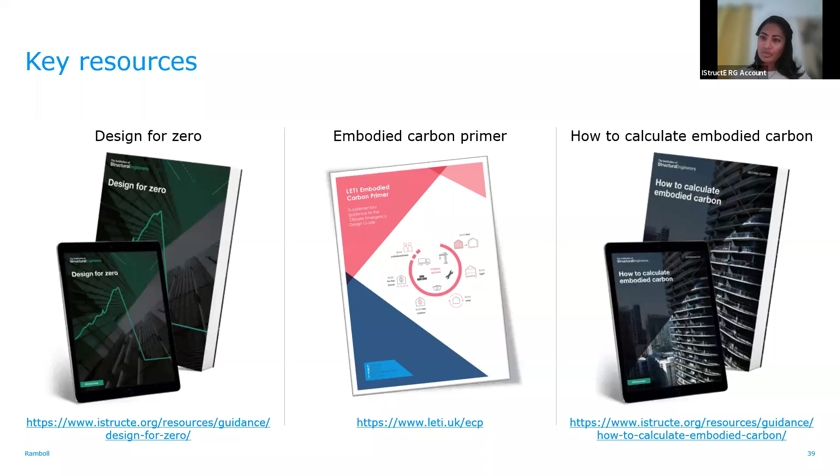Because when I'm presenting this to the client, there's no government regulation that tells them their carbon needs to be reduced by a certain amount. Maybe large organizations try this movement to do it, but generally for private clients and most of the clients in the region, they don't care about carbon. What they care about is how they can save a bit of money off their facility or building. I know one way is to reduce things like the thickness of your slab. What are the other things you would approach if that was your challenge, in terms of reducing costs?

Yeah, it's a good question. Actually this is one of the myths I presented in the last one, which is that sustainability costs money. I think this is a common perception in the industry, but actually a lot of the most sustainable outcomes involve just doing a lot more with less. If you have less material in your building, then you have lower costs. So if you've got thinner slabs, then less material needs to be produced, and that saves cost and carbon.

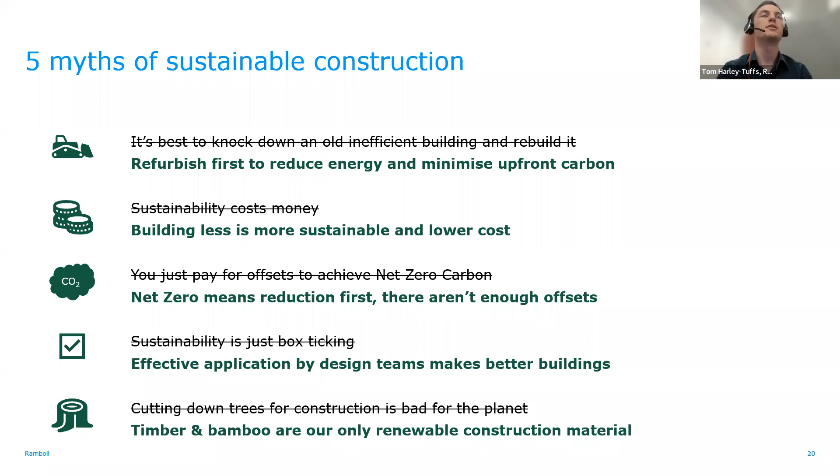So I would focus on the things at the top of this hierarchy, around the use-less-stuff bit. As soon as you get into specifying low carbon and offsetting, all these things cost money. Whereas building nothing, building less, building clever, and approaches like optimizing, taking out basements, removing transfers, reducing grid sizes, reusing existing buildings—all of these things are going to be cheaper because they use less stuff and require fewer resources to be produced, and there'll be significant carbon benefits as well.

So if you focus on the bits at the top of the hierarchy, then hopefully you can also demonstrate that there's still social and economic benefits to the client, but with much less environmental damage and much less expenditure upfront.

Okay, all right, great, hope that answers it. Do we have any other questions? I see we have 41 participants left, and we do still have 10 minutes with a question left.

Tom. Yes, Dominic. Thanks, Tom, again. I have a question about the—

Embodied carbon equivalent number for steel, which the structural tool uses, which doesn't—the global number excludes China, which is interesting because China produces over half of the world's steel. So is that really a global number? I don't see how it can be. So why doesn't, I don't know if you know the answer to this, but why doesn't the IStructE tool—I mean, obviously they state that caveat—but why doesn't it, what's so bad about China?

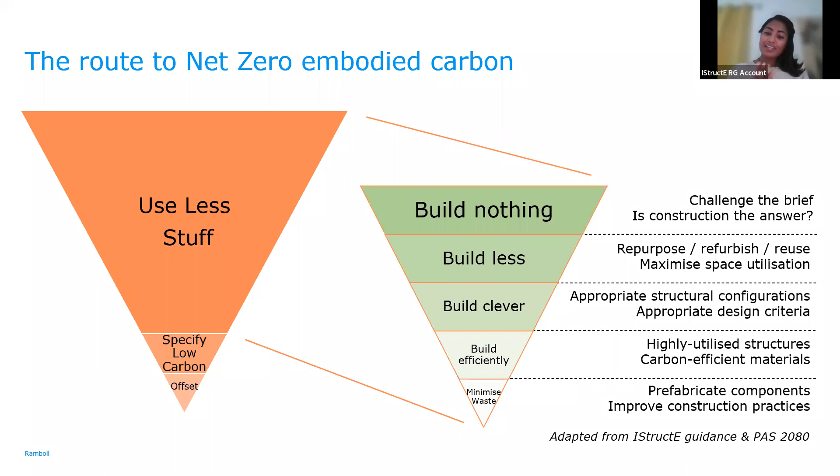Cool, thanks for that, Shani. You're welcome, that's good. I think over the last two webinars we've had a minimum of 50 people, so I'd say on average we had 55 people across both of them, which has been great. We should have practiced the slides a bit more though.

No, I mean the carbon calculating tool - I actually used it for the first time recently, and I very quickly used it overnight because I was trying to show some carbon data on a restoration project I did in Grenada, and just how much carbon we saved by not having to rebuild this new facility. Just by looking at beams and slabs, it was a considerable amount of carbon. So it makes a big difference. The tool is fantastic.

It's pretty easy to use. Thanks for explaining the little chart at the base that says A plus to D - I wasn't sure what my result was or what it meant, I was just like, I don't know how to use this data. Yeah, it's been great, cool.

Thanks so much for doing this, we'll keep in touch. Yeah, let's keep in touch. You're based in Manchester, not London, right? Yeah, but I'm down in London like once a month, and most of my team is based down in London.